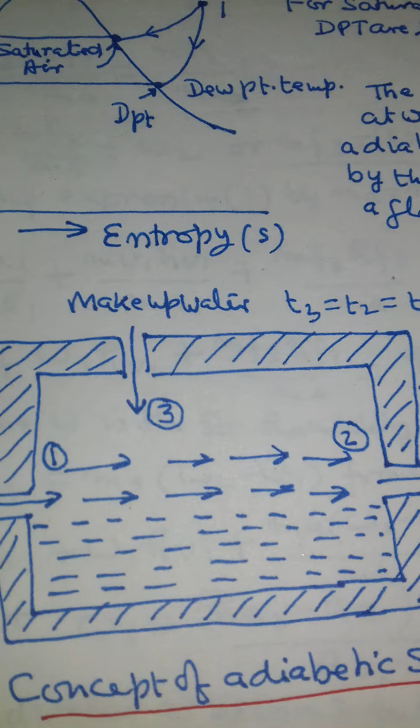Dew point and adiabatic saturation temperature.

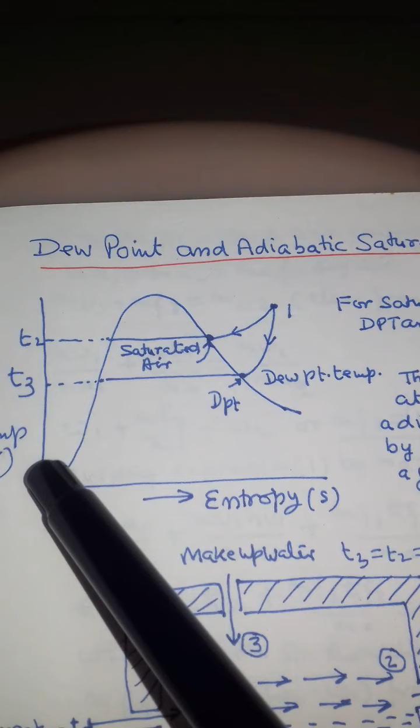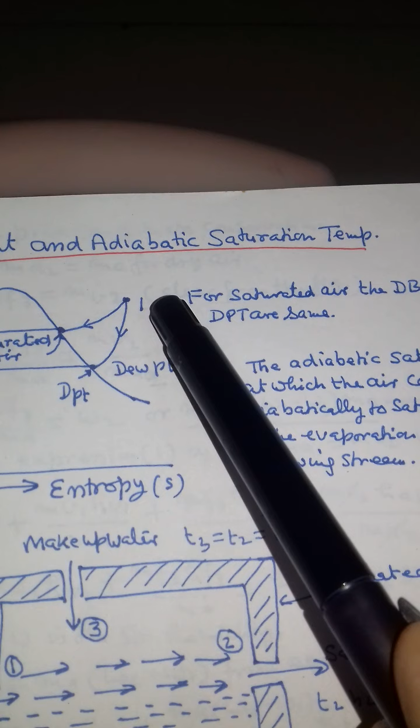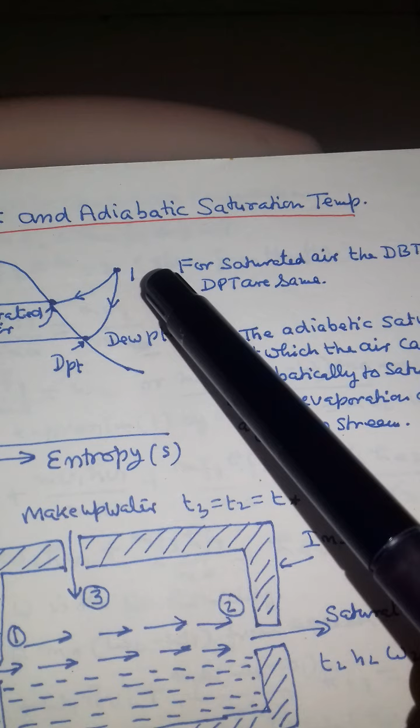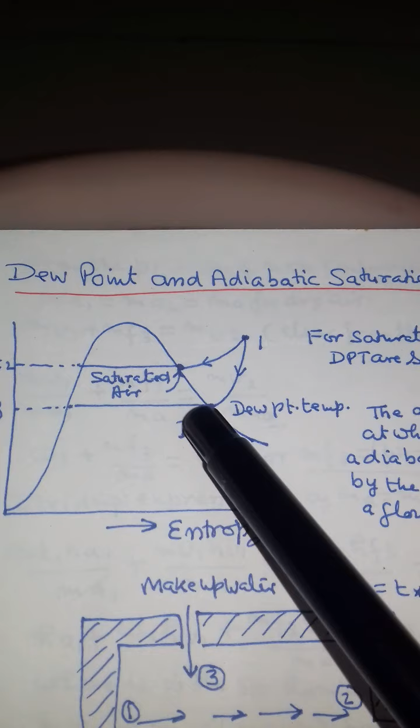We have got the sketch between temperature and entropy. This is the curve. Now dew point: suppose if the air is at point 1, so when the temperature is reduced, then what will happen? Suppose it is in a room, and air is existing over there, temperature is reduced, so after some time we will reach from point 1 to point 3, and it will just start touching the curve.

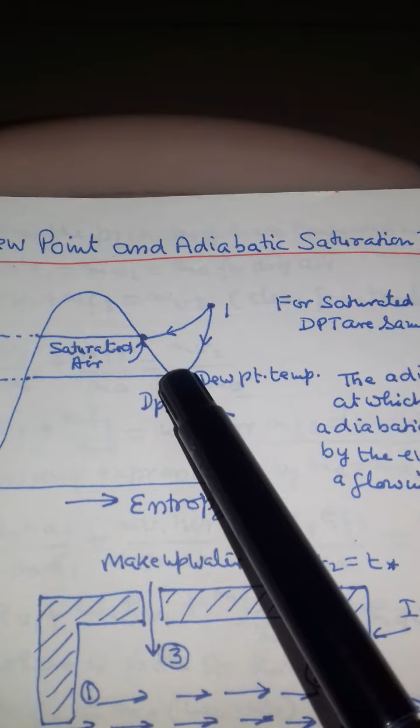Here it will be DPT, dew point temperature. Here it is dew point temperature. For saturated air the DBT, WBT and DPT are the same.

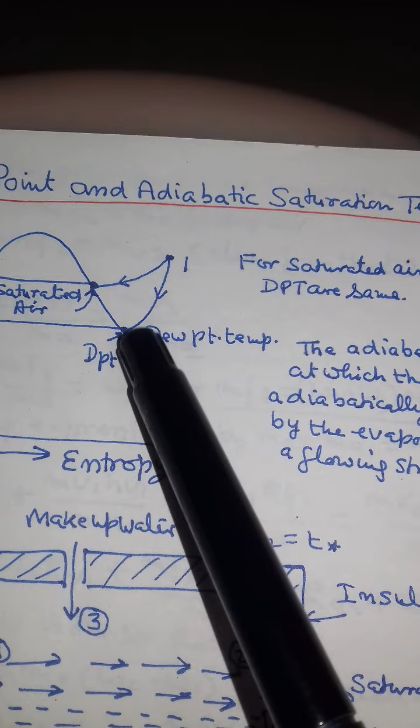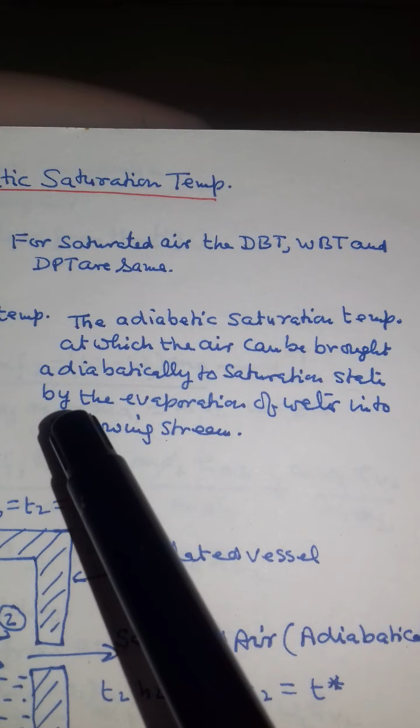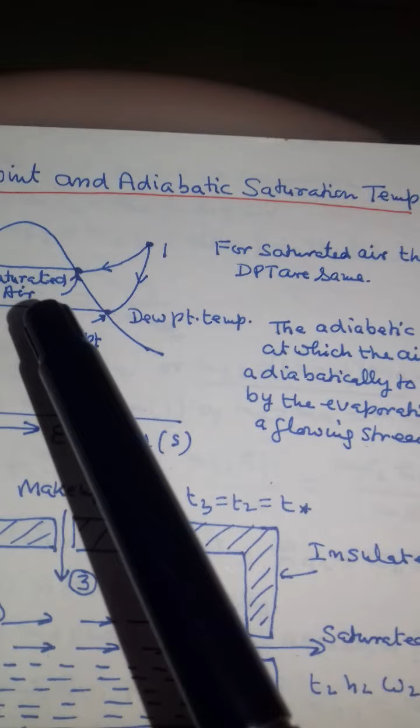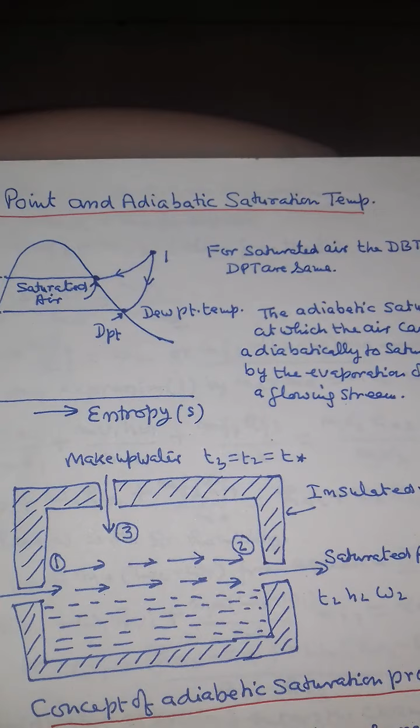The adiabatic saturation temperature is the temperature at which the air can be brought adiabatically to saturation state by the evaporation of water into a flowing stream. So you can see that from point 1, when temperature is reduced, we are reaching the point DPT, that is dew point temperature, and that temperature is reached when we go on reducing the temperature of the room or in any space.

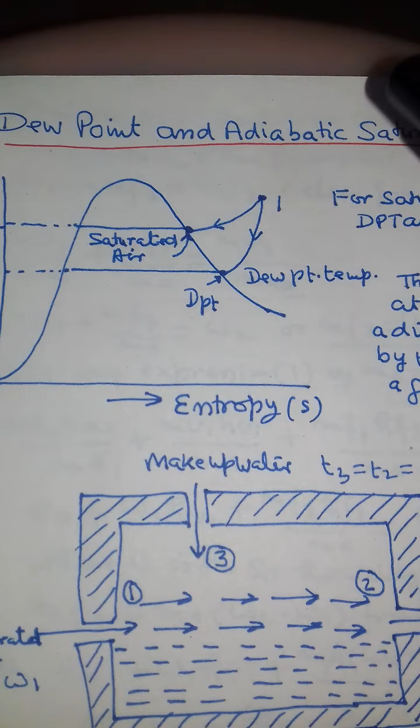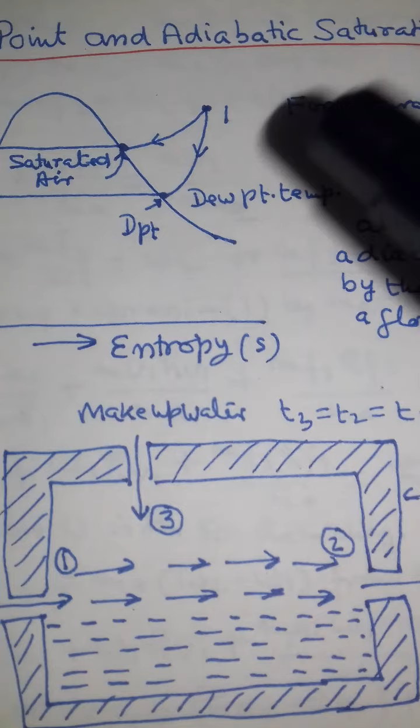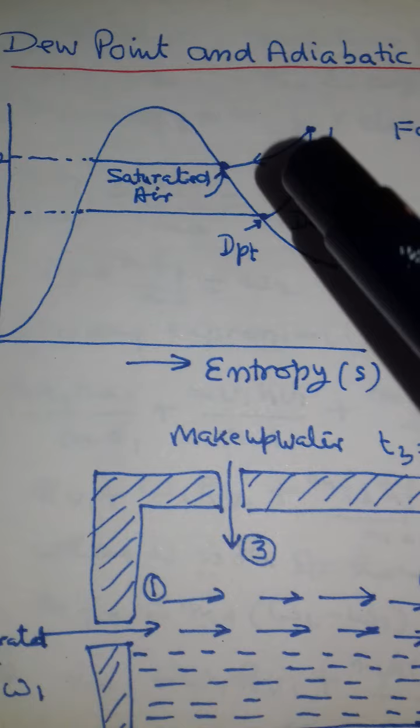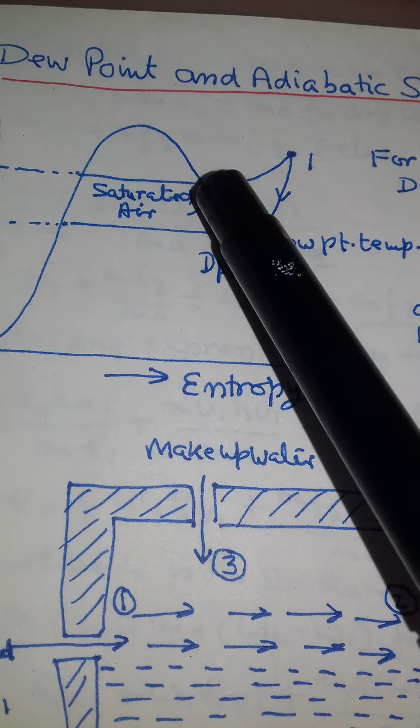Another process of reaching the saturated point is by injecting water. From point 1, by injecting water we can reach this very saturation point. So in two ways we are reaching the point: one is by reducing the temperature of the room, and another by saturating with water, applying water in the room and bringing the temperature down.

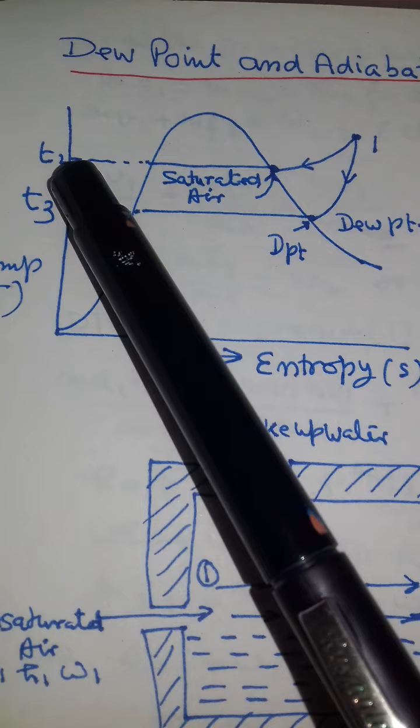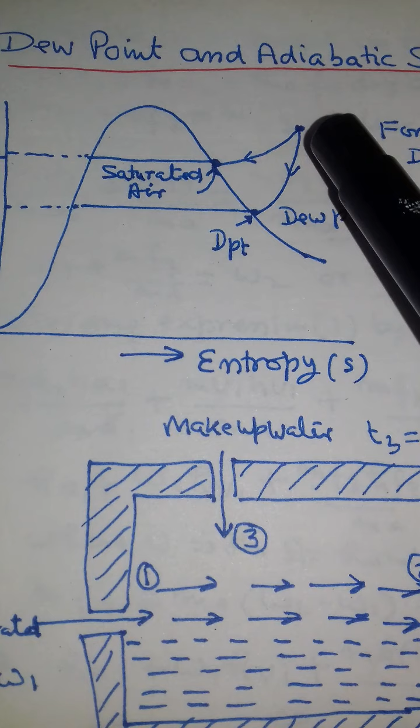Now this temperature which has been reduced from 1 to T2, this is exactly what happens in desert coolers. In desert coolers, the temperature is getting reduced with the help of flowing air over a stream of water.

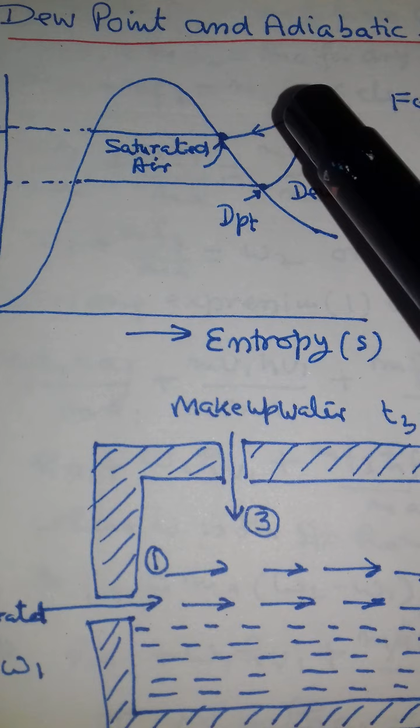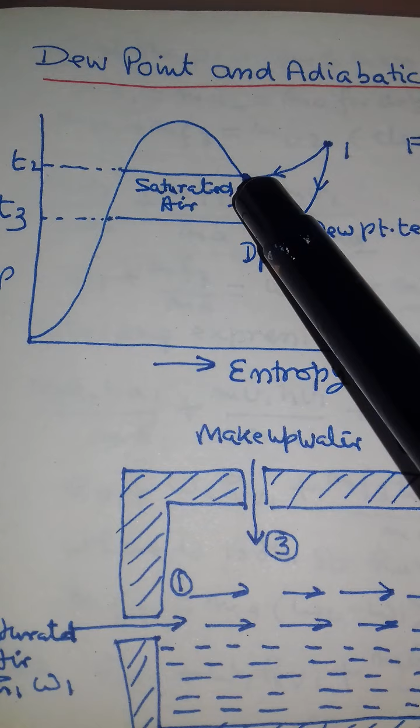So in that way we get the dew point temperature DPT, and another way of getting temperature T2 is when we allow the air to pass through the water stream.

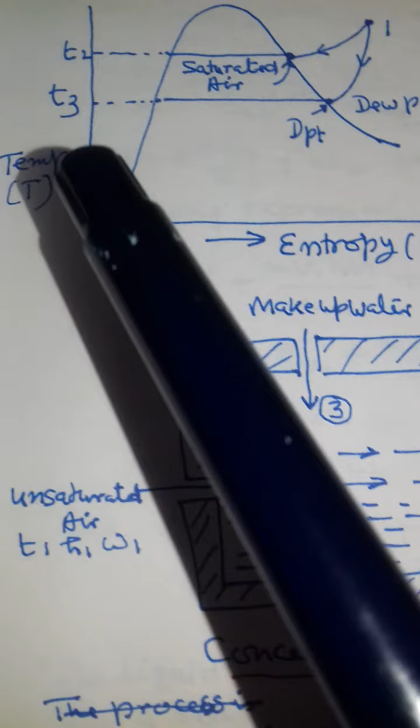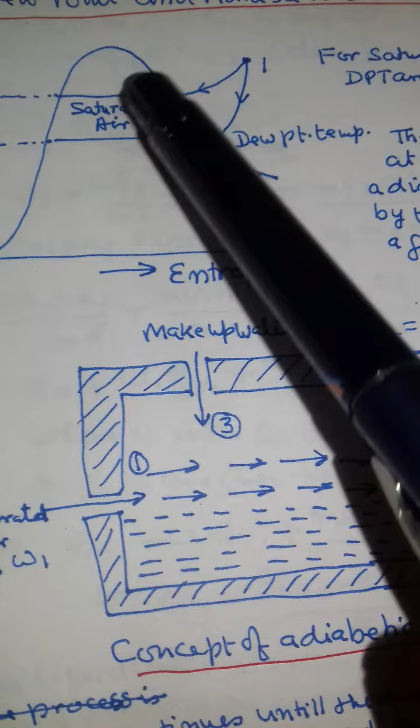Now this was the curve between temperature and entropy. This top point is known as the critical point. The left hand curve is the liquid curve, and the right hand curve is the vapor curve. So the liquid curve and vapor curve intersect over here at the top, and that is called the critical point.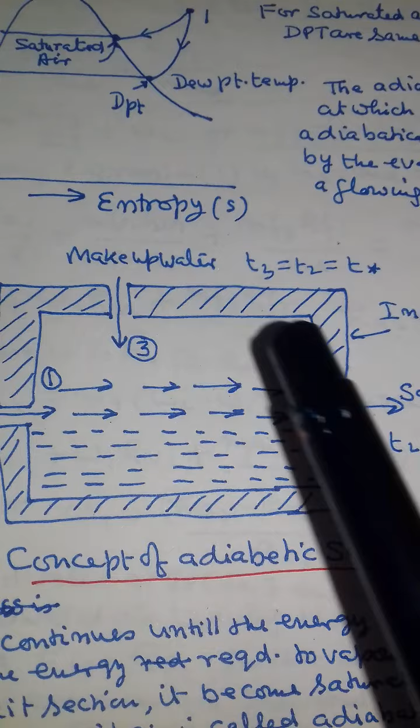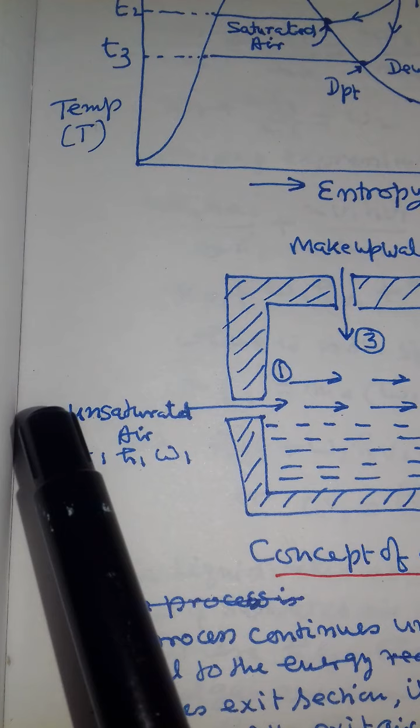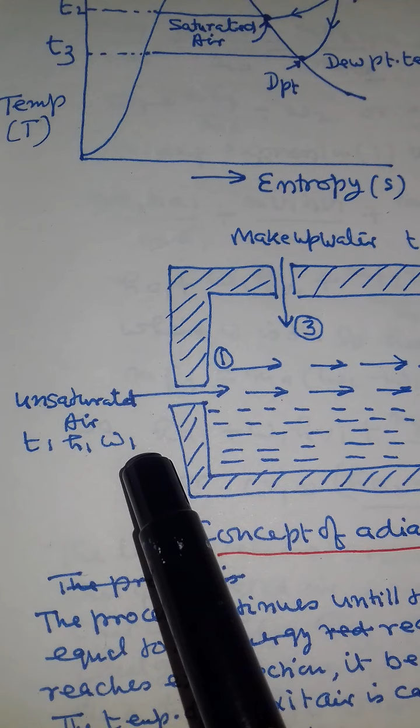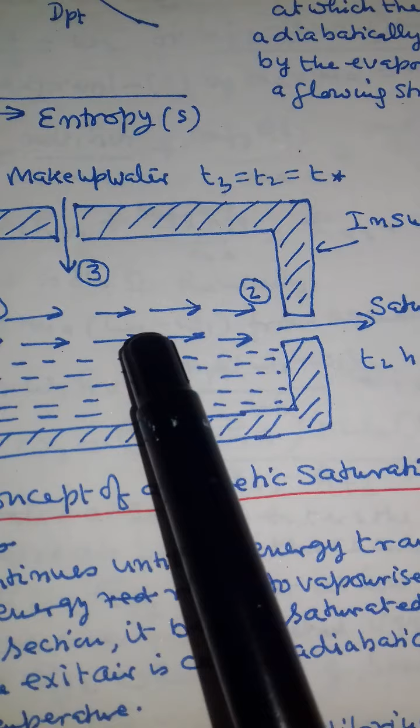Now this vessel is filled with water, and air is being charged at point 1, that unsaturated air, at temperature T1, enthalpy H1, and specific humidity omega 1. This is the entrance air, and it travels over the water surface, taking heat from the water surface, and then it goes out. When it goes out, its temperature is T2, enthalpy is H2, and specific humidity is omega 2.

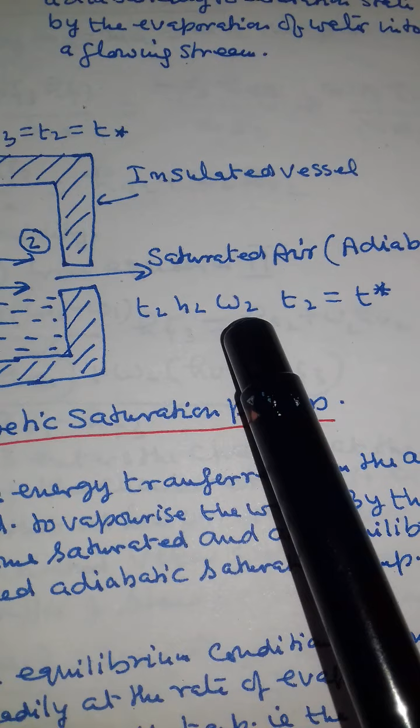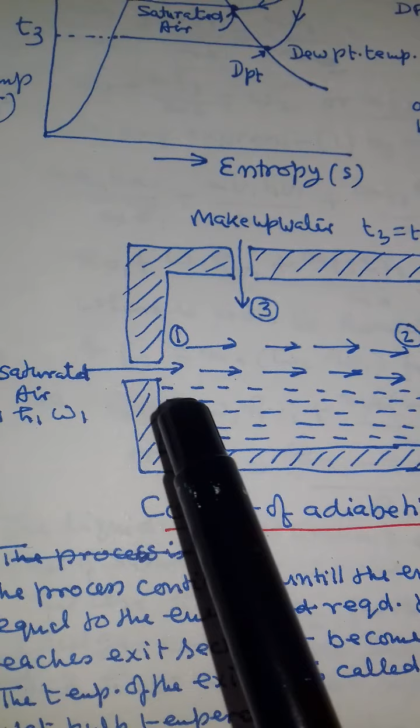Now this temperature T2 has been shown as T star, and this is your adiabatic saturation temperature. Now when the water is getting evaporated from here, we have to make up the water also from somewhere, because as the air passes through this, energy of the air is discharged to the water, and the water gets evaporated.

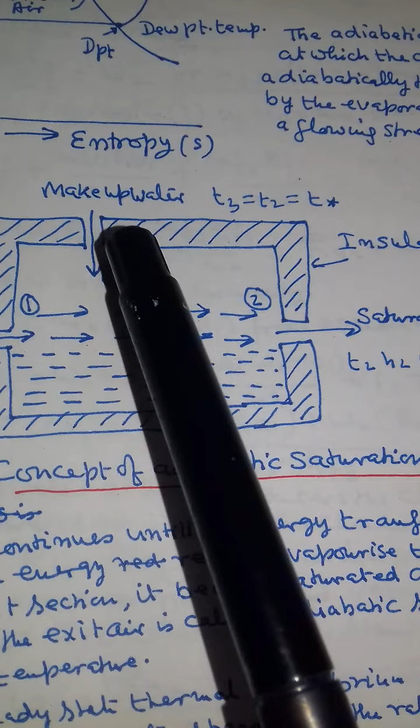So there is transfer of energy from the air to water to get it evaporated, and to compensate the water which is being consumed, we have got the makeup water system at point 3. Here the temperature is T3, but this temperature should also be equal to the temperature of outlet air, so that an energy balance is reached inside the container.

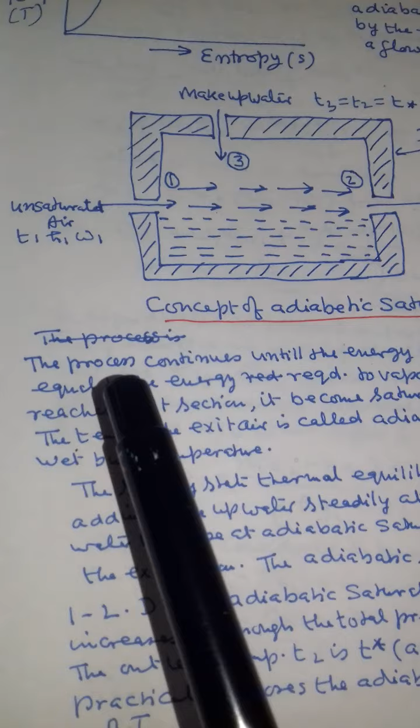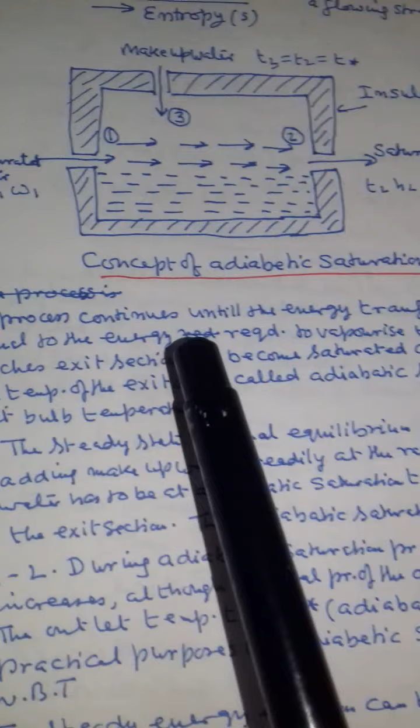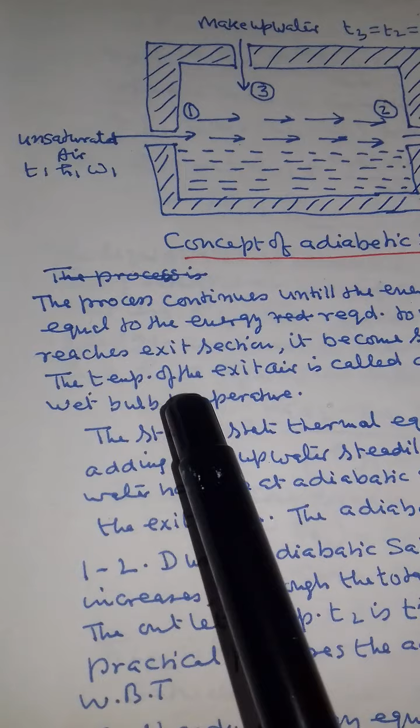Now, concept of adiabatic saturation process. The process continues until the energy transfer from the air to the water equals the energy required to vaporize the water. By this time the air reaches the exit section, it becomes saturated, and an equilibrium is reached. The temperature of the exit air is called the adiabatic saturation temperature, or the thermodynamic wet bulb temperature.

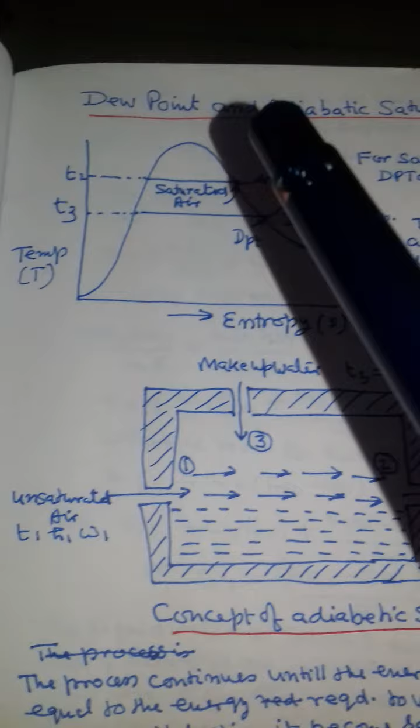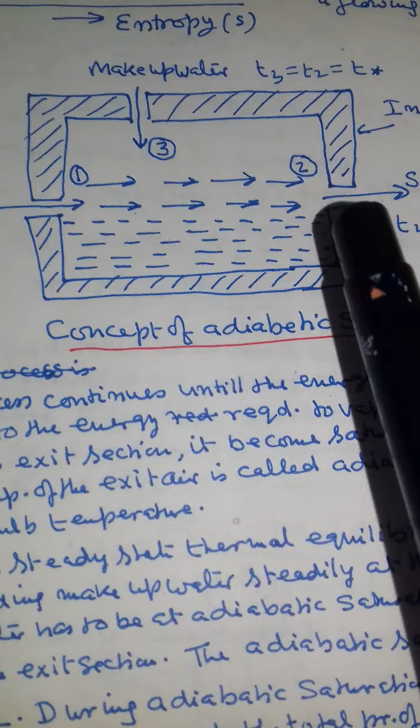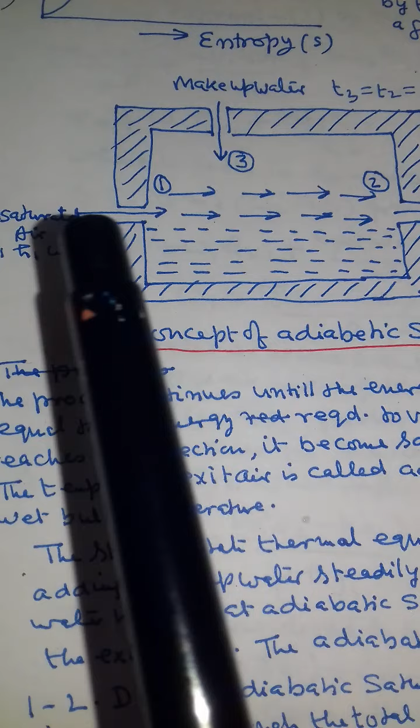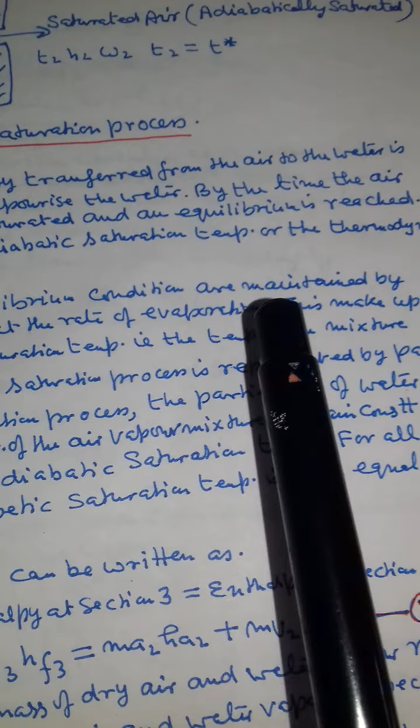In the starting I have shown you that we are going to deal with the adiabatic saturation temperature. So this temperature, the air which is coming out from the vessel, at the outlet of the vessel, that is your adiabatic saturation temperature. The air which is coming in contact with the water is imparting energy to this water, and the water gets evaporated and goes out, and we make up the water from outside. The steady state thermal equilibrium conditions are maintained by adding makeup water steadily at the rate of evaporation.

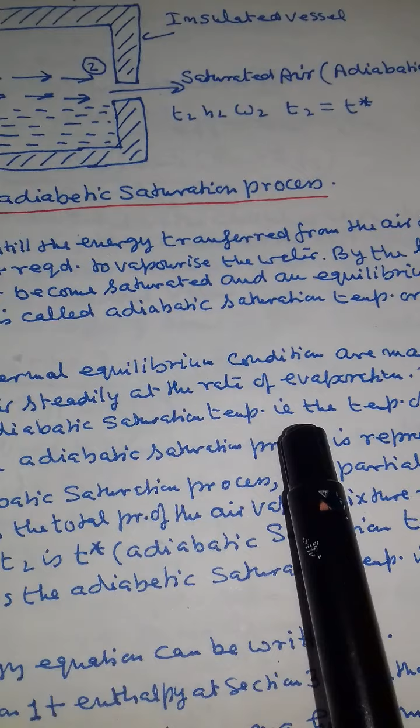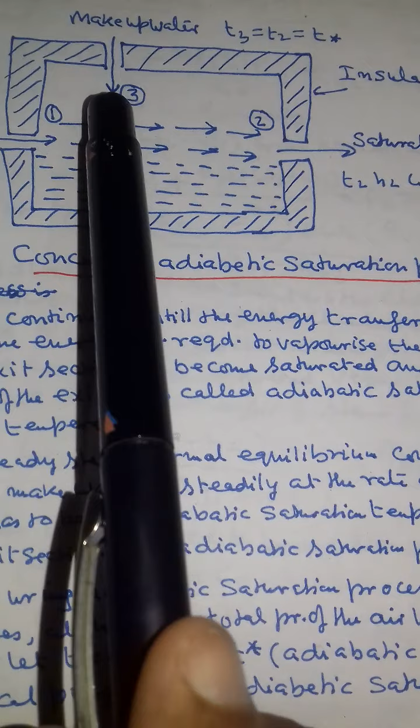This makeup water has to be at the adiabatic saturation temperature, that is the temperature of the exit air mixture. The water which is being made up from point 3, that should also be at the adiabatic saturation temperature, that is the temperature T3 should be equal to the temperature T2.

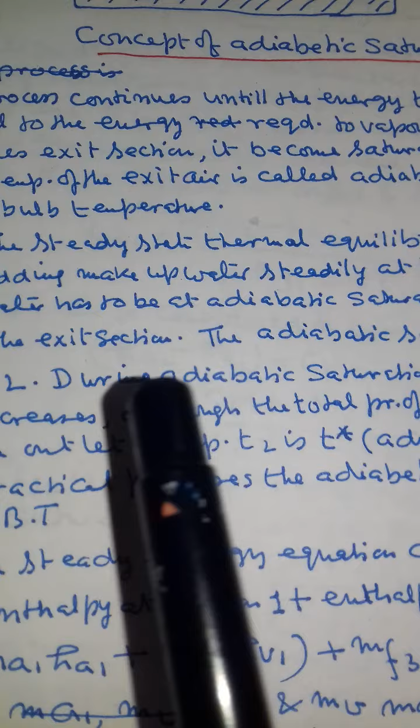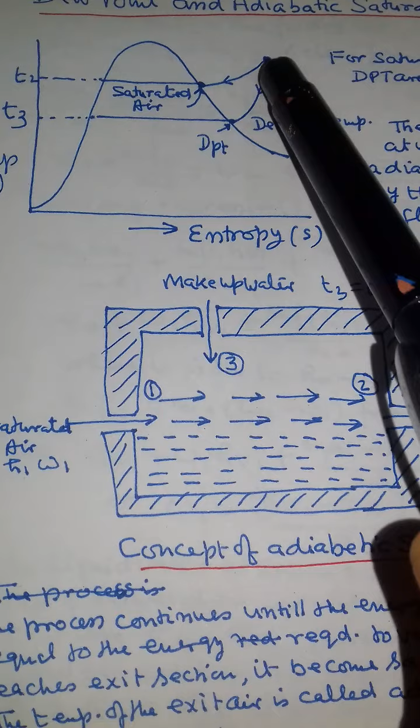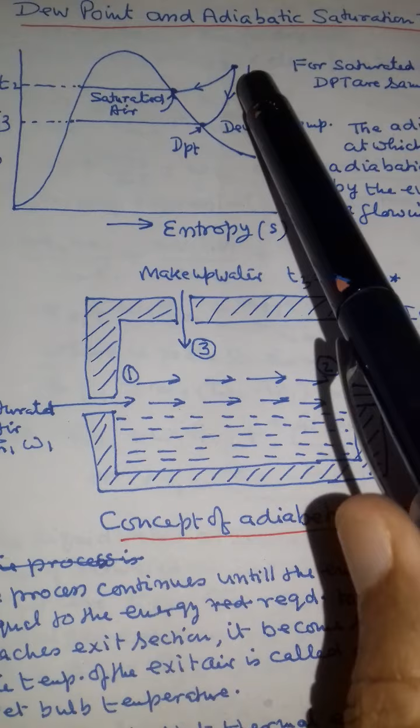The adiabatic saturation process is represented by the path 1 to 2. On the T-S diagram, this path 1 to 2 is the adiabatic saturation process. This means air is being forced through the water, and that water gets evaporated, and the air also gets cooled down. So from T1 to T2 via process 1 to 2, this is the adiabatic saturation process.

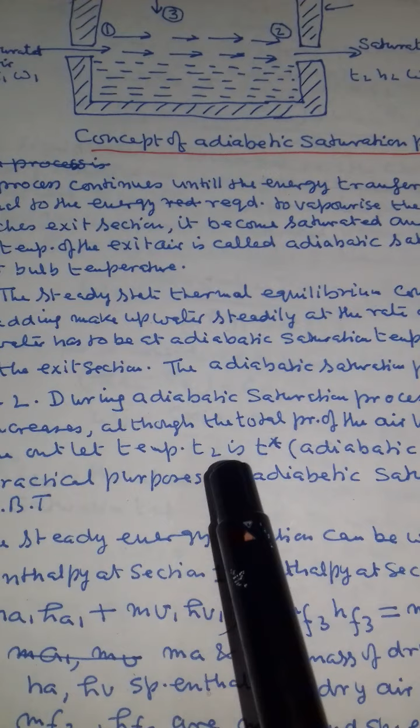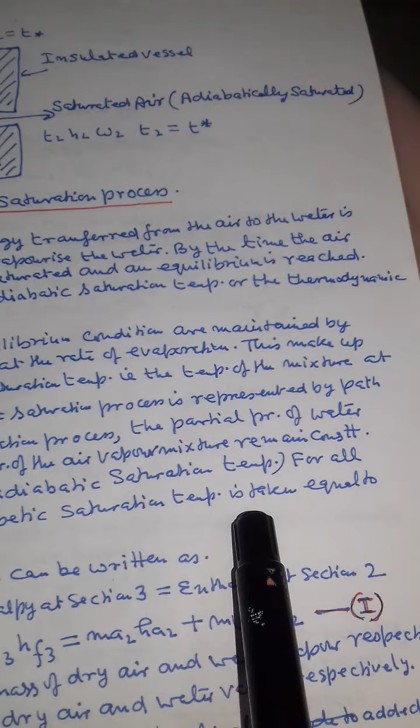During the adiabatic saturation process, the partial pressure of water increases, although the total pressure of the air-vapor mixture remains constant. The outlet temperature T2 is T star, the adiabatic saturation temperature. For all practical purposes, the adiabatic saturation temperature is taken equal to the wet bulb temperature.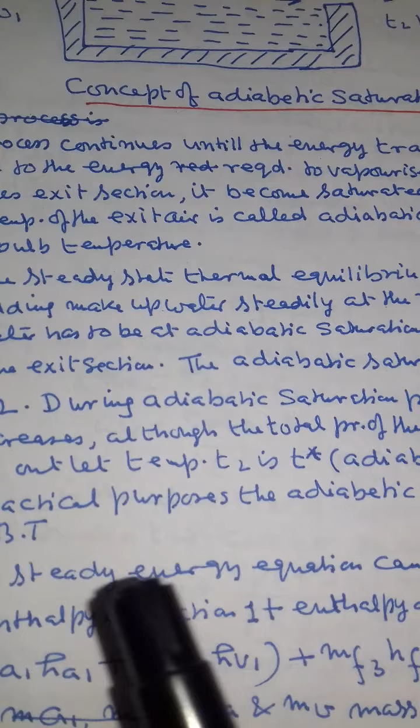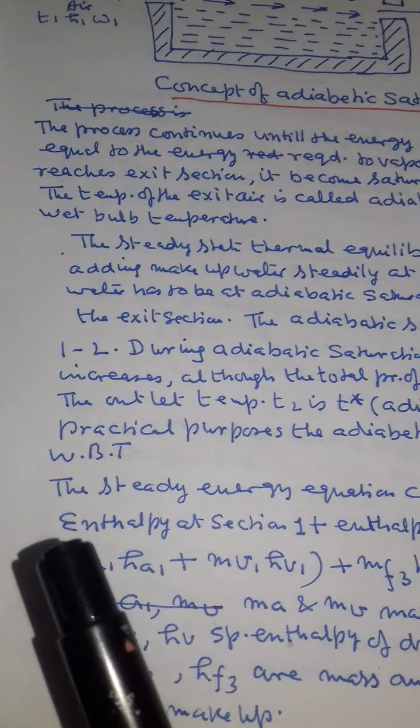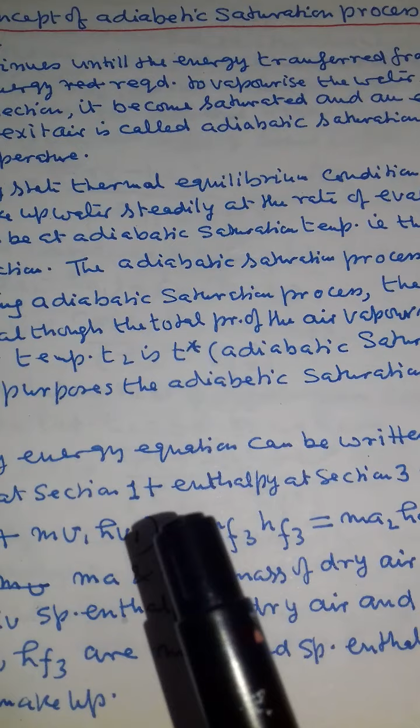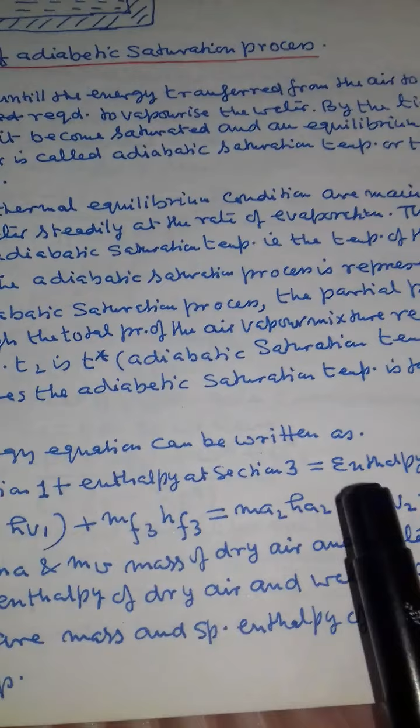The steady energy equation can be written as: enthalpy at section 1, the air which is coming in, plus enthalpy at section 3, the water which is being supplied, equals the enthalpy at section 2. So this is the energy balance: enthalpy at section 1 plus enthalpy at section 3 equals the enthalpy at section 2.

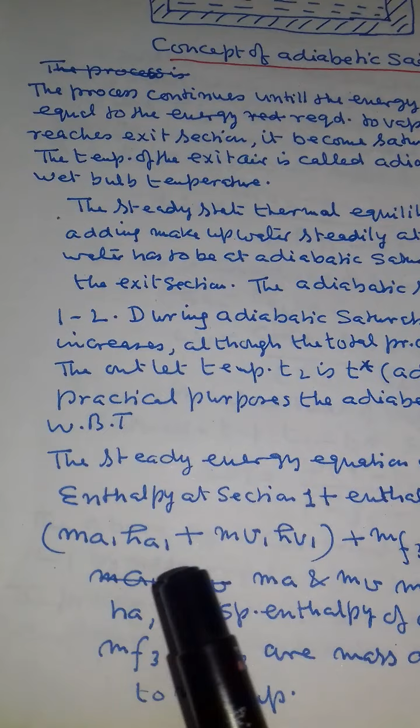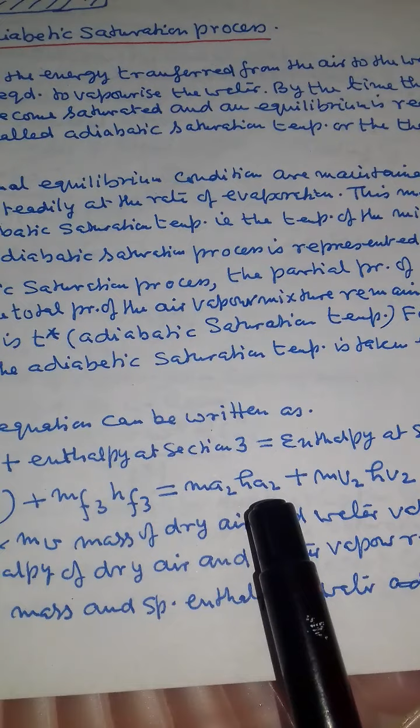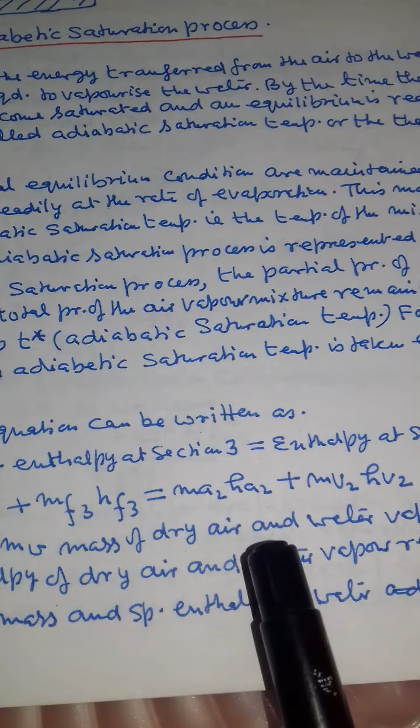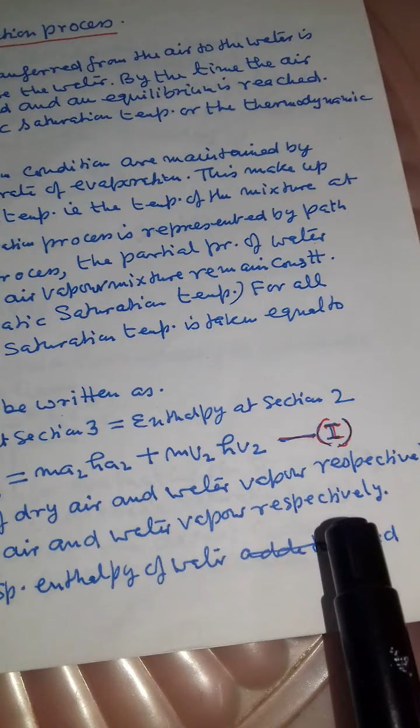Now what is the enthalpy at section 1? Ma1, mass of dry air, times Ha1, plus Mv1 Hv1, plus Mf3 Hf3, equals Ma2 Ha2 plus Mv2 Hv2. That is equation number 1, where Ma and Mv are the mass of dry air and water vapor respectively, and Ha and Hv are the specific enthalpy of dry air and water vapor respectively, and Mf3 and Hf3 are the mass and specific enthalpy of water added

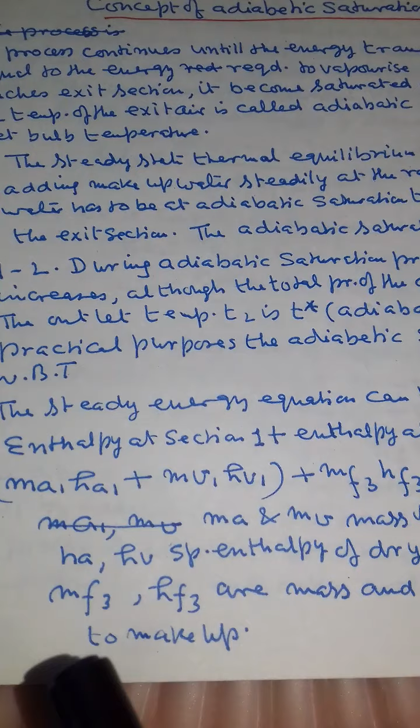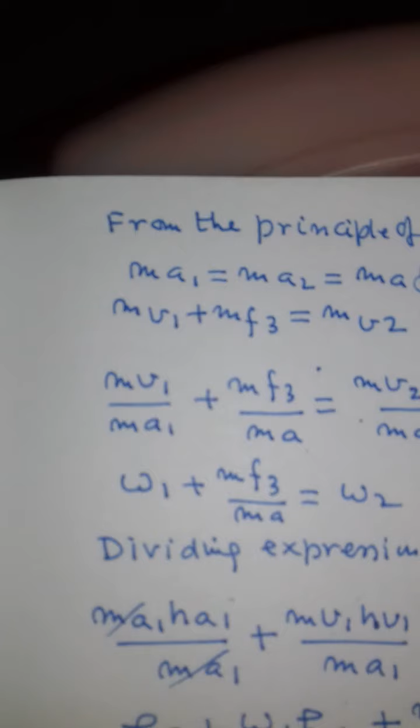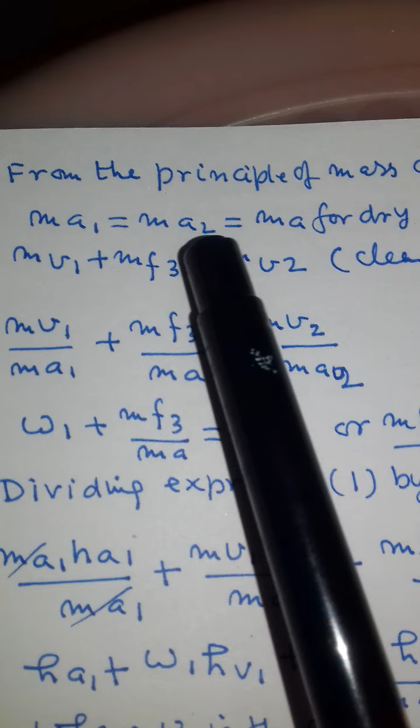From the principle of conservation of mass, Ma1 is equal to Ma2, because the entrance air mass and the outlet air mass are the same, equal to Ma for the dry air. So Mv1 plus Mf3 is equal to Mv2.